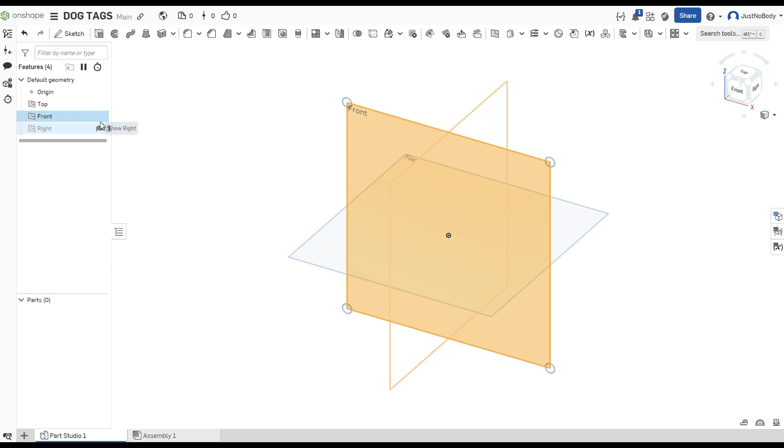Alright, let's create some dog tags. New project. First thing, just turn off the front and the right, we don't really need those. We should use the top for this.

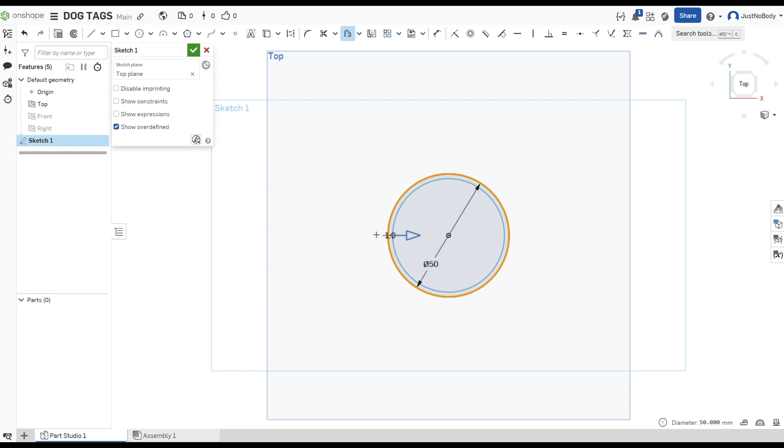New sketch. We're going to take a circle in the middle, drag that out, and make that straight up 50 millimeters. Then we're going to grab our offset tool.

Click on the ring, drag that in, set that at 2 millimeters. Next we want to extrude the sketch. Click on the center circle and extrude that 5 mil.

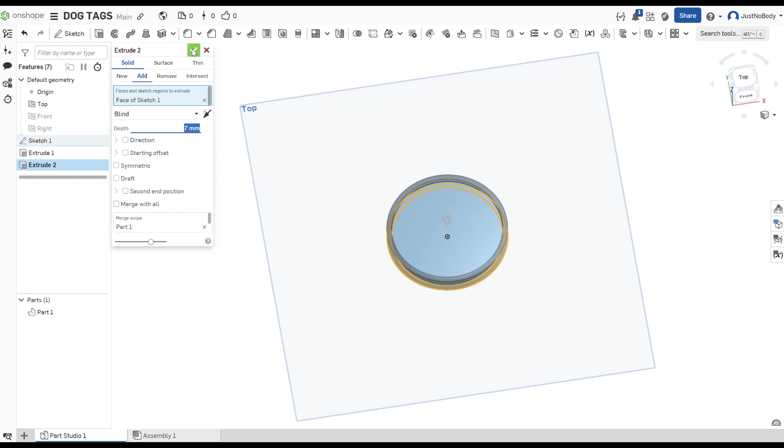Then we're going to create another extrude. Make sure our sketch is still on, grab the ring we just created and extrude that 7 millimeters. That's it, that's the basis for our dog tag.

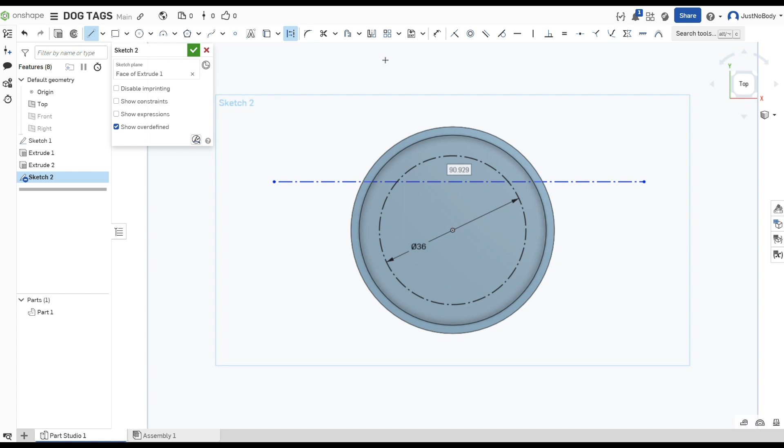Now we create another sketch, grab a circle, turn on construction line, and drag that one out. Then we'll grab our line tool, make sure we're still in construction, and drag a straight line across. We're just going to dimension that, set that to about 14 millimeters.

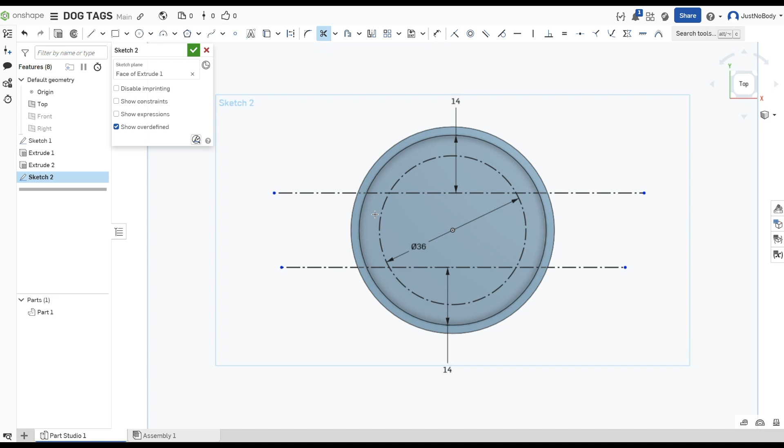The idea is here we're going to create two D shapes. Another construction line, same thing, drag it across, dimension that to 14 millimeters from the inside ring. Now snipping tool, I'm going to cut away these two parts of the circle, leaving us with these D shapes, otherwise our text won't fit properly.

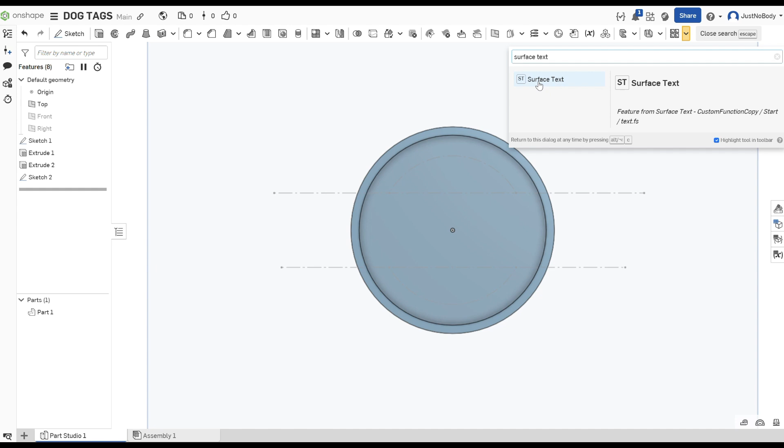If you can't find the text tool, hit the search bar here, type in surface text, and you'll be able to add the text tool to your screen. Select that one. Now select the line that we created on the bottom, then select the base that we're going to type our text onto.

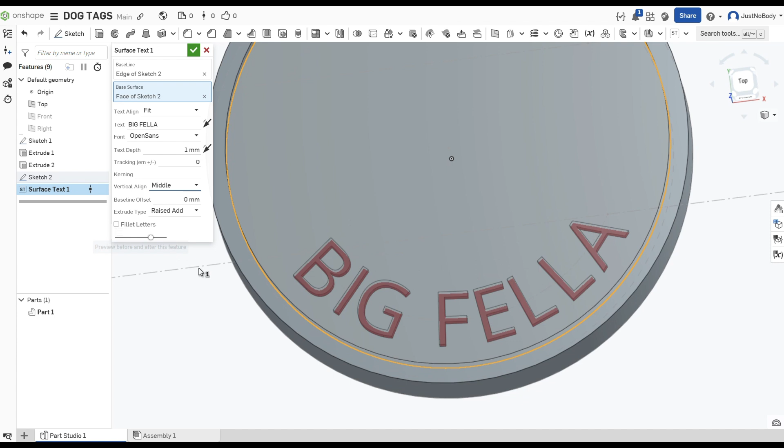Let's change the text, put the name of the dog in there. Now extrude is quite long, so let's change that to 1 millimeter, and maybe let's change the down to the middle line so it's a bit closer.

And change the text, I don't really like that one. That's better. Alright, maybe just fillet it a little bit. Perfect, look at that. Alright, we're onto something.

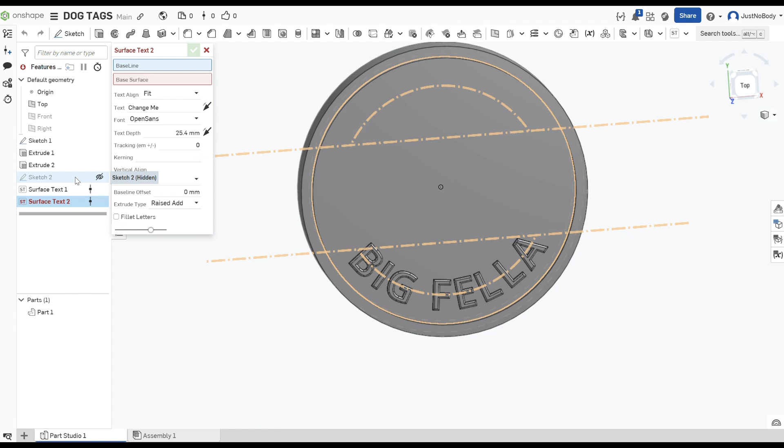Now we're going to do the same thing again. Surface text tool, make sure our lines are still on. Select the top one. This is where you're going to put your phone number in case anyone finds your puppy. Type that in there, change it to 1 millimeter.

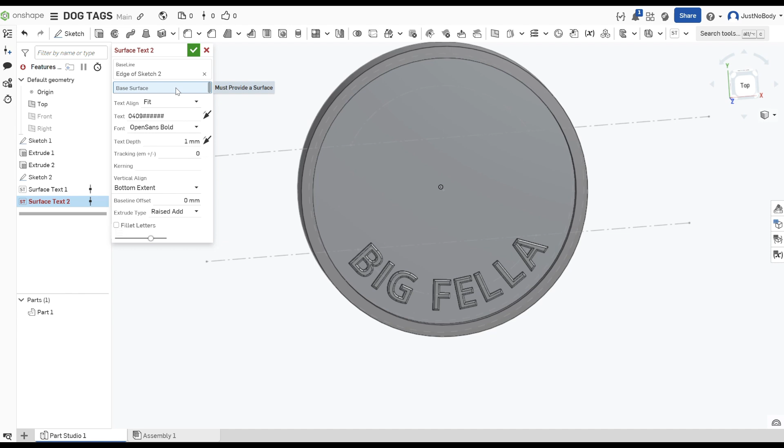Change the font to match the other one, and select the baseline. Alright, now it's in backwards.

Let's fix that, we just click this arrow and it will flip the text around. Now it's probably a little bit too close to the top, so let's bring that down to the middle line again. Cool, look at that. A bit further, that's more like it.

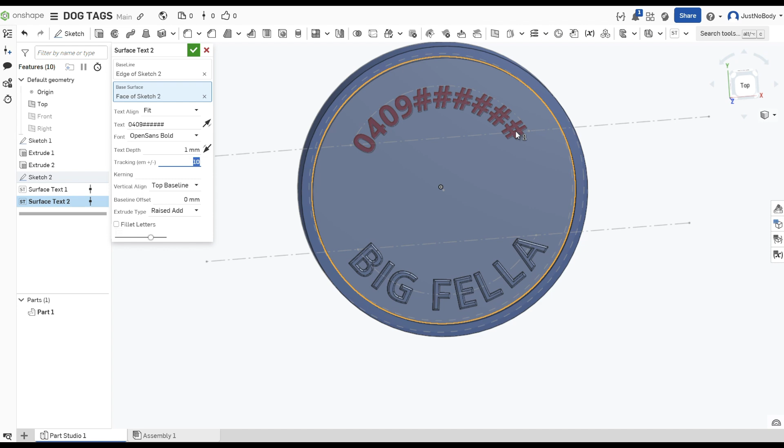There we go, because we need room to put a little hole in the top. And space those out a little bit because they're a bit close together.

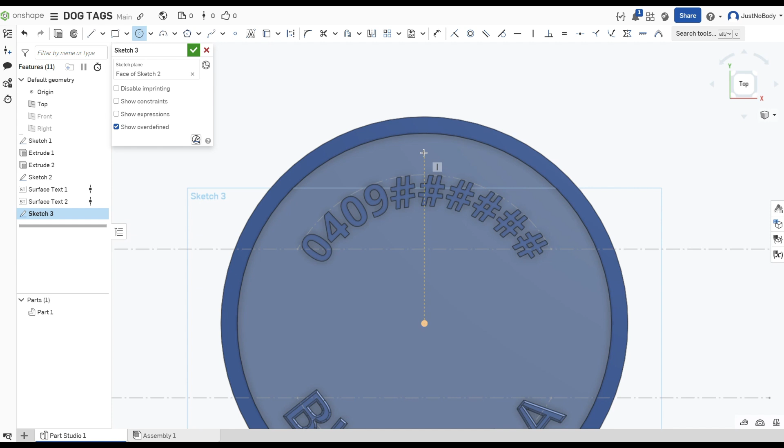Alright, now let's put a hole in this guy. You could just use a hole tool, but we need a bit more involved to do that. So let's grab another sketch, follow our center line, make sure we're up in the middle there.

And let's just draw a circle, let's make that one 4 millimeters, so you can put a ring through it. Now I'm going to hit extrude, then hit remove, that'll put a nice little hole through.

Perfect, now let's just put a little fillet on the inside, 0.5 mm, perfect.

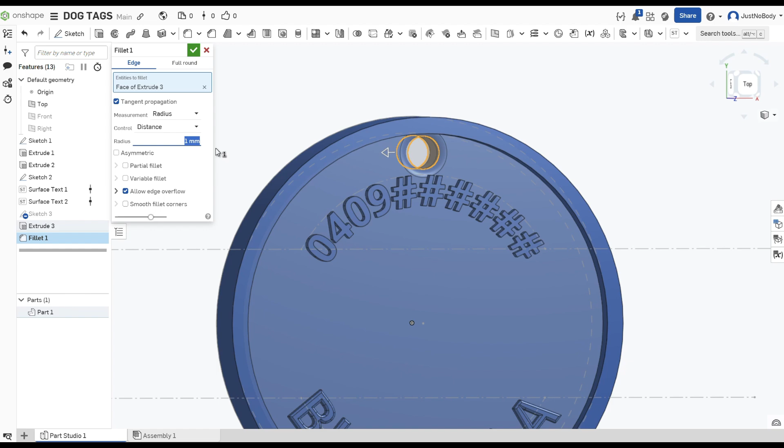1 millimeter is a little bit too large, it starts to interact with the rest of the shape, so let's go with 0.5 millimeters. I like that. Tick, alright, now we've got a tag.

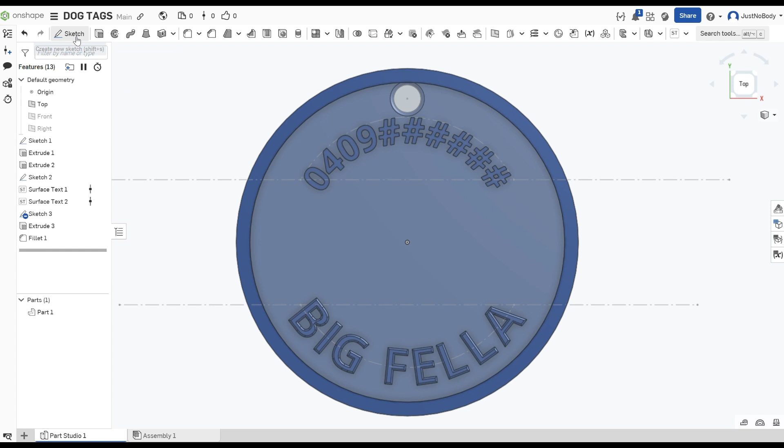All it needs is maybe a pretty little design on it, perhaps. So let's grab our circle tool, draw a circle wherever, like that, and let's give it some shape.

Now we're going to grab the semicircle, 3-point semicircle tool, or 3-point arc. We're going to try and make this look like a dog paw. Place your arc down and then stretch it out.

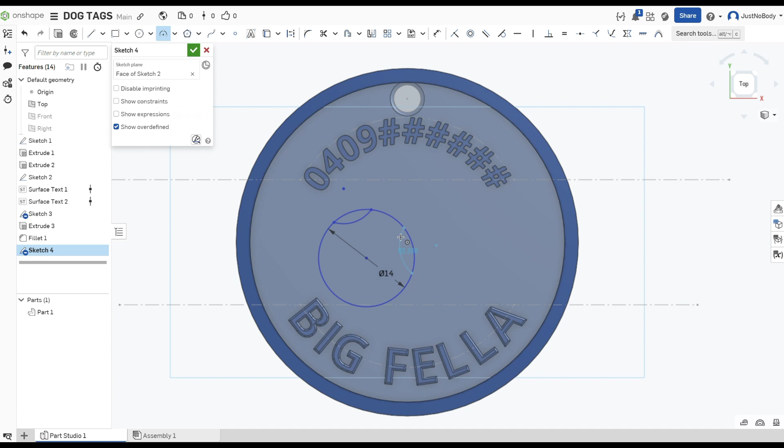Perfect, I'm going to do the same on the other side, trying to make sure we don't line it up with any structures on there, otherwise we won't be able to move it later. Looks pretty good.

Now to give it some shape on the bottom, I'm going to grab the spline tool. I'm just going to draw a shape here, just clicking, get a nice little curve in there. Make sure we line it up on the bottom, hit escape.

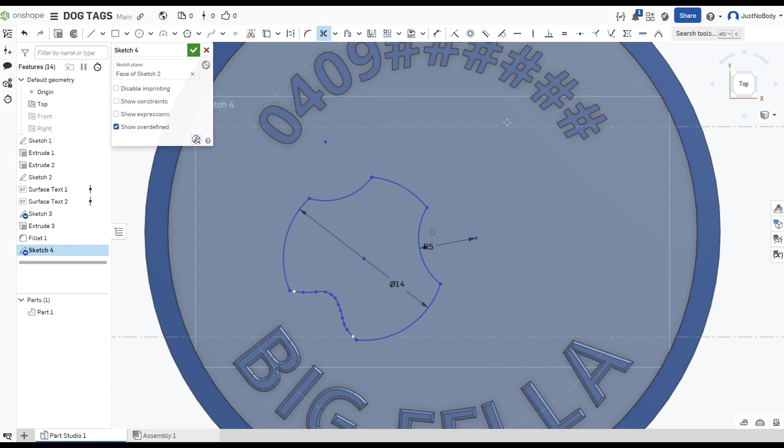We just grab these splines and move them around to adjust them if we don't like the shape exactly. Alright, now we just need to grab our pair of scissors and trim out those little parts. And that's the start of our dog paw.

After that, let's grab the ellipse tool and draw a few little toes. Put them wherever, because we can just move them later, as long as we don't attach them to anything. So 4 little toes.

And we'll just click and drag them to where we want them. We can resize them as well if we like. There we go. Somewhat of a dog paw.

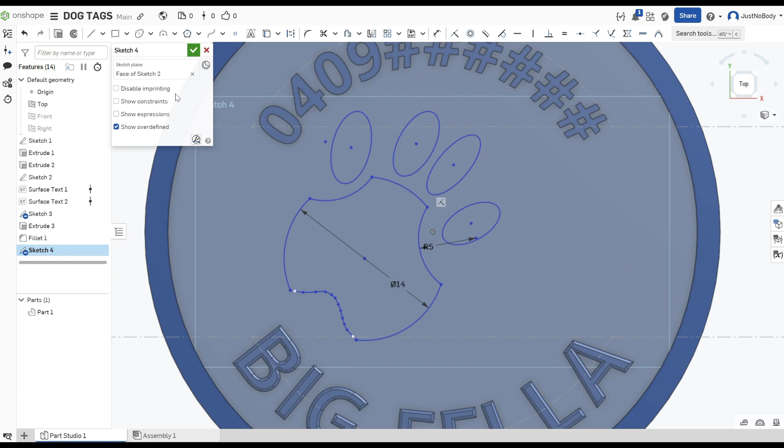Alright, let's hit extrude, let's bring that out 1 millimeter like everything else. There's a dog paw, it's a bit rough. I want to smooth out some of these edges, make them look a bit organic.

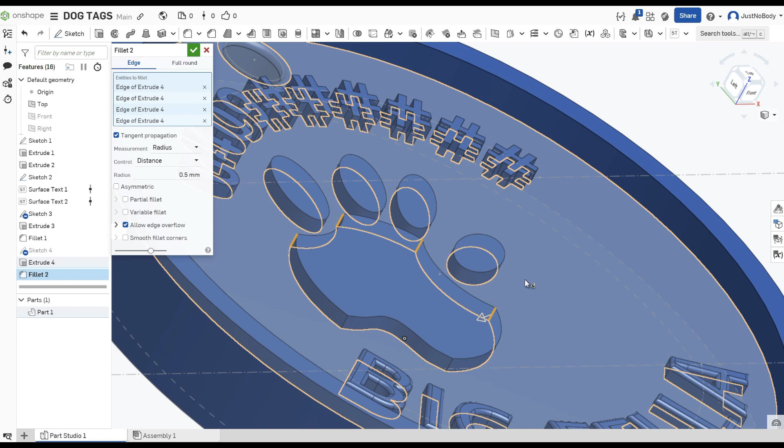So let's grab the fillet tool and just click on the vertices, and grab this little arrow, drag them in so it looks a bit more organic. It's a bit better, cool.

And maybe let's do the same with the bottom too. Point there and that point there, drag those in and tick. Alright, now we have a dog paw.

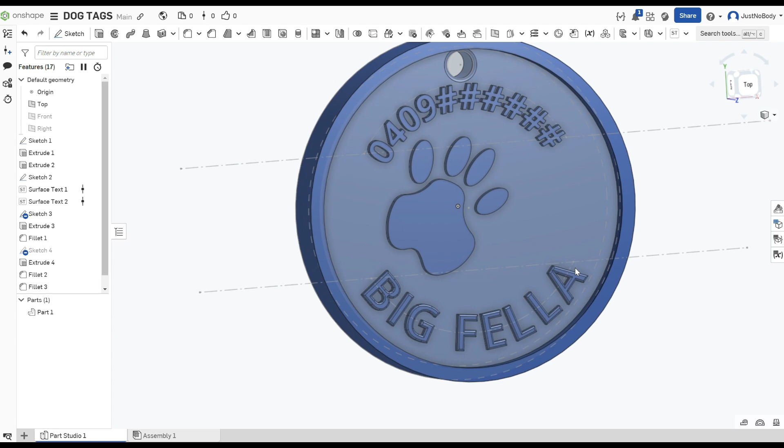Looks pretty good, it's a little bit off center. I don't quite like that. And we can't move it as it is.

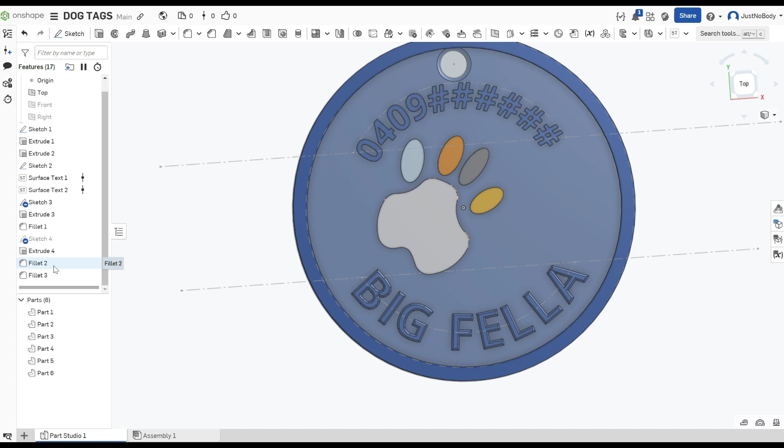So we're going to have to go back into extrude here, and instead of add part, we're just going to change it to new part. It's going to create all these new parts like that.

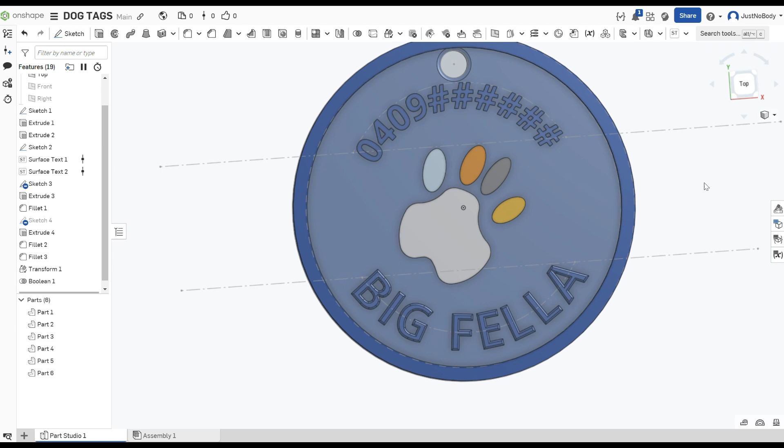And then what we're going to do is grab the transform tool, select all our parts together, and then these arrows appear. We're going to go translate by XYZ and drag it to where we'd like it, something like that. Hit the check, alright, there you go.

There is a little tag for your puppy dogs. Have a bit of a look at it. I like it, happy days.

Alright, let's hit export and chuck it into the slicer.